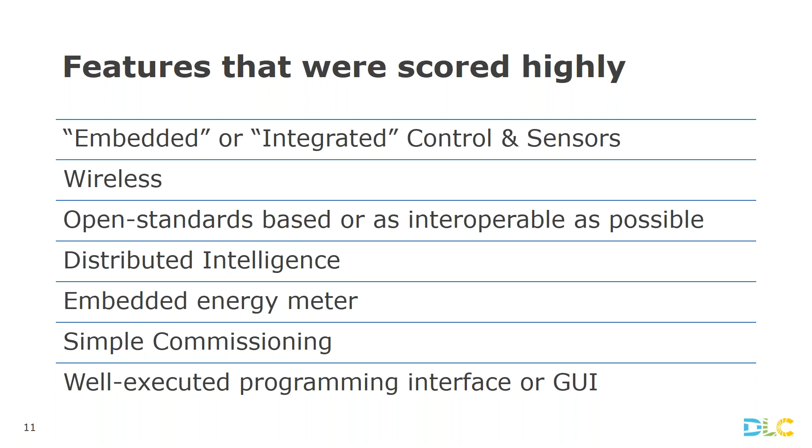Finally, the scorers were looking for systems with well-executed interfaces and simple commissioning. As we know, historically, the complexity of these systems has contributed to higher costs and slower adoption. Out of the 9 technologies that were selected, we ended up with 5.

It was a challenge to find host sites, maybe not surprising, but there was a lot of additional participation required to support these projects by host sites, a strict timeline, which unfortunately didn't fit into the decision-making process of some of the host sites that we talked to, and the systems were not offered for free, and that was by intent. We really wanted the host sites to have some skin in the game, and so they did contribute some towards the cost of these projects. So in the end, we found 5 host sites.

First was Two Roads Brewing Company in Stratford, Connecticut, who installed the Digital Lumens system. Then Rhode Island Public Utilities Commission in Warwick, Rhode Island, installing the Philips SpaceWise system. A multi-tenant medical office building in Avon, Connecticut, installed the Cree SmartCast system.

A Super Stop and Shop grocery store in New Bedford, Massachusetts, installed the Daintree from GE Current system. And finally, Yale University in New Haven, Connecticut, installed the Enlighted system. I'd like to give you a little bit more information about each site and technology, and then Michael will take us through some of the findings.

Our first site was Two Roads Brewing Company in Stratford, Connecticut. This was a large brick industrial building that was renovated in 2012 to hold Two Roads Brewing Company. This is an industrial scale brewing operation with bottling and brewing operations, a warehouse, shipping and receiving, a large bar, tasting room, as well as retail space and corporate offices for the company. The facility was about 100,000 square feet.

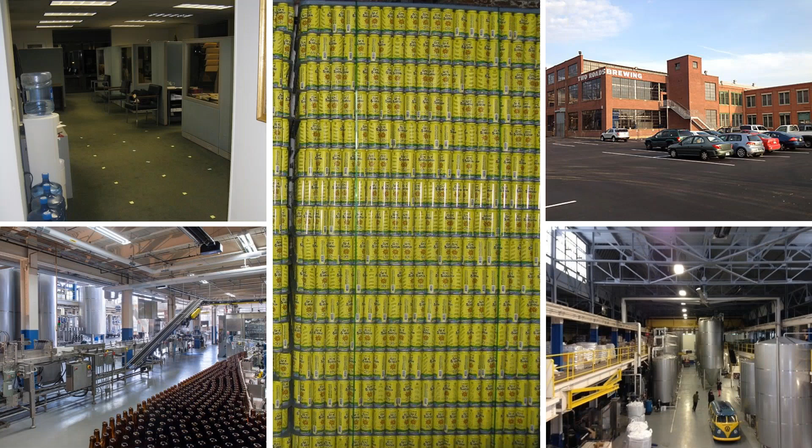We have a few photos of the site here. I would like to note here, maybe at the beginning, that we had some technical difficulties in finding all of our photos, so I apologize, but some of the photos here of the sites are lacking. We might have liked to show you more pre and post photos, but we don't have that.

So you can see on the lower right, the site included some large high bay spaces for the brewing operations with some opportunities for daylight that you can see in the upper left there with some windows. The lower left is some of the low bay space for bottling operations. Upper left is some of the office space.

And in the middle there is, if you're in the Northeast, an iconic, hard to find beer called Sip of Sunshine, and all of us were sort of drooling, never having seen pallets full of it. It's usually something you have to wait in line an hour for to get. So that was fun.

This next slide is showing some screenshots of the Digital Lumens LightRules software. During a post-installation site visit, they showed us how they were using this software. On the lower left is a photo of the scheduling interface, which is really more like an Outlook calendar that enabled them to easily set different schedules for different areas of the facility. This was something they were not able to do, or not easily do, with their prior lighting control panel.

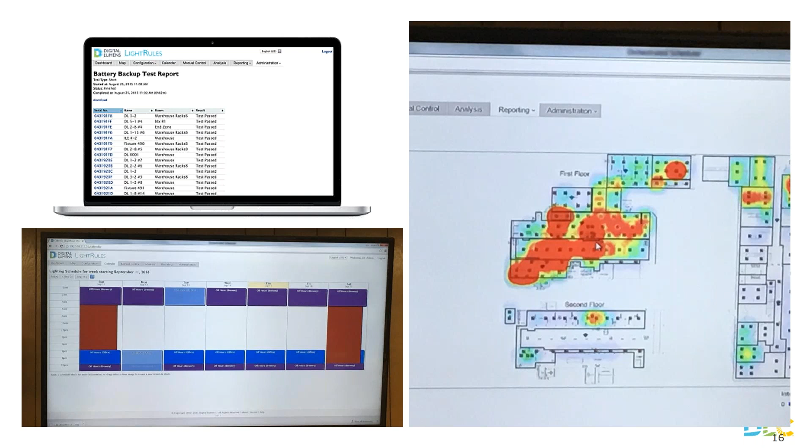On the upper left is a screenshot, actually grabbed online, not from on site, but it was something they showed us on site that we didn't get a picture of: a capability provided by this Digital Lumens system to automatically test battery backup emergency lighting and produce a testing report for OSHA emergency lighting testing compliance. This was something the brewery was pretty excited about. This previously required a manual process, walking around the entire facility to test each luminaire and produce a report for OSHA compliance. With this new system, they can produce a report at the touch of a button.

Our next site is the Rhode Island Public Utilities Commission. This is a 3-story building that houses the state's regulatory body with responsibility for oversight of the state's utilities and communication entities. In many ways, this was like a typical office building with private and open offices, conference rooms, and corridors. However, in addition, it also included a large hearing room for regulatory proceedings that was more like use cases for auditoriums or presentation spaces that were able to benefit from the flexible control provided by the advanced control system. Like the last project, this one involved replacement of T8 lighting, and some of the spaces here actually already had occupancy sensors, which we'll talk more about.

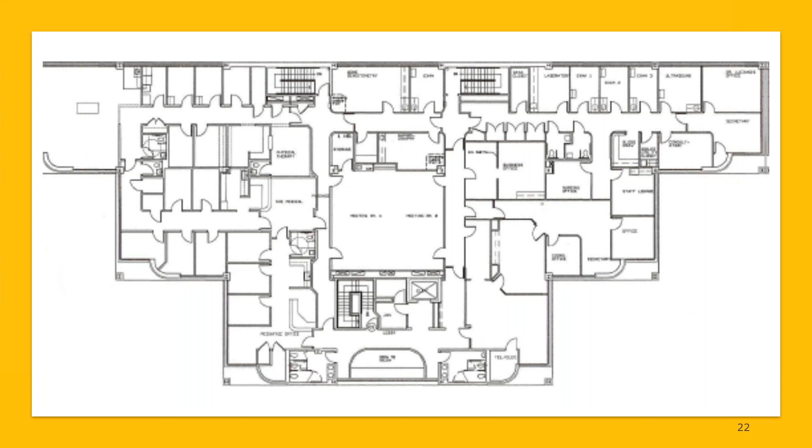We were not able to locate the photos for this project, so I'm showing you the best we were able to find in the files, and this is a floor plan of one of the floors. One thing to point out here is you can see the large number of small spaces. These were the small offices and exam rooms. And we'll talk about some of the challenges we encountered there around occupancy sensors.

The fourth site was a Super Stop & Shop located in New Bedford, Massachusetts. This is your typical full service grocery, over 70,000 square feet. It included a large retail space and some back of the house spaces for offices, shipping and receiving, and storage. Existing lighting at this location was T8, and there were no existing controls beyond some very basic scheduling controls.

The technology installed at this site was the Daintree Enterprise Wireless System by GE Current. This system is the only system that uses an open standard-based protocol, a Zigbee-based communication protocol. It does utilize a gateway and a server that houses the operation and configuration software. At the time of this installation, embedded sensors were not offered by the manufacturer. They are available now. So we didn't pre-install sensors with this one. We installed more traditional remote mounted sensors.

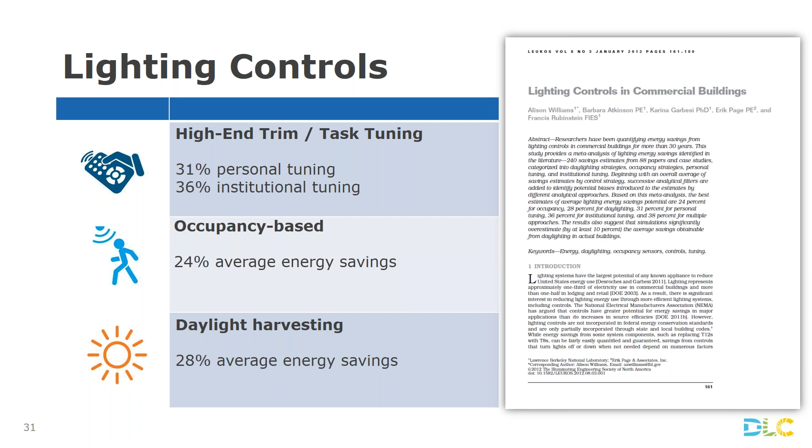Continuing on. So we saw about a total of 40% energy savings when you only looked at the controls. So the concept here is if you've already moved to a new technology baseline, and you only analyze what did the controls provide as an energy savings, it was 40% compared to that baseline.

The three different colors give you a representation of how that 40% was developed, with tuning representing about 50% of the total energy savings, about half of the total energy savings, with occupancy sensors being the next dominant amount of energy savings, and then finally daylight.

As you can tell by the two bands there, both daylight and occupancy sensors provided roughly the same amount of energy savings. It's a good time to note that, as I showed in the previous slide, energy savings from tuning typically is in the mid 30 percentile.

We are seeing with new LED fixtures that some manufacturers are shipping one fixture and sites are tuning them significantly. So in some cases, a fluorescent system might have drawn 30 or 35 watts, but it's being replaced with a 40 or 42 watt LED fixture, possibly for SKU control and other management issues on the manufacturer side, or the contractor doesn't want to have to manage which fixtures go where, and then they just are going to tune them in the space. So in some cases, we've seen some artificial tuning numbers that are maybe 60 or 80%. At that point, it's probably that the new fixture installed was over capacity, but there were other reasons for it.

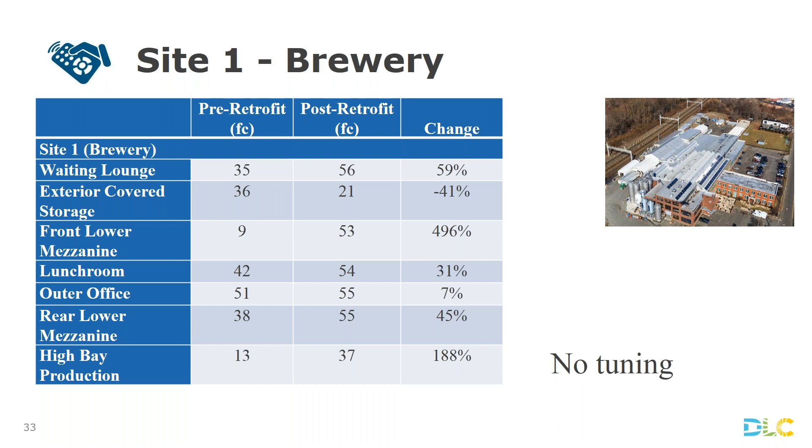There are some high light levels. 56 foot-candles in a waiting lounge is a pretty bright waiting lounge. Same with a lunchroom. Had they used tuning, they probably would have reduced those levels and seen some additional energy savings.

Continuing on, the medical office, as Gabe mentioned, this was a multi-tenant medical office, which complicated the demonstration, obviously. The other challenge here was the site originally resisted activating certain levels of controls. They went first with occupancy sensors and didn't activate the daylighting and some of the tuning features, even though they were already installed on fixtures. It wasn't until a second trip back to the site that they activated those features.

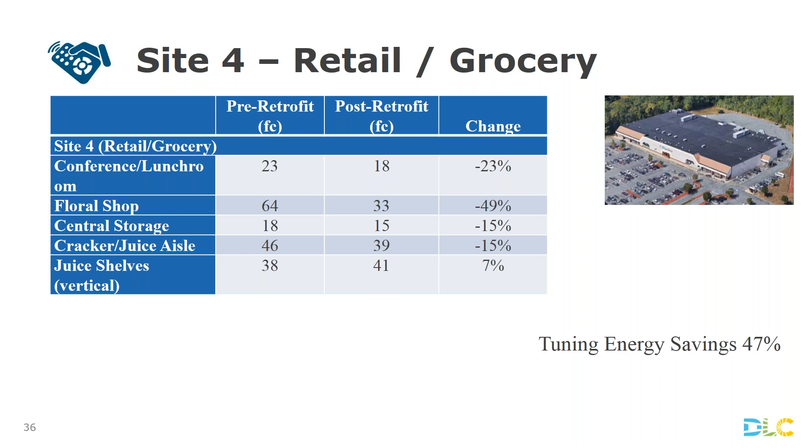But notice the change they saw in the floral shop, going from 64 foot-candles to about 33 foot-candles. Again, tuning allows you to really not have to accept one light output for the entire space, and you can dial it in. In a retail application, it's a great example of you may want less light in a floral shop, either to just make things stand out or to draw people different places in the store.

In the previous installations, they were going from straight on, off. In the newer settings, they were going from on to low output to another time delay, then finally off. So that is reducing some of your energy savings. Also, there's a difference in sensitivity features between the two controls, and the digital ones might be more sensitive. So it's something to pay attention to as you migrate to newer controls. They may not behave the same way you previously thought, and you may result in some cases in negative savings.

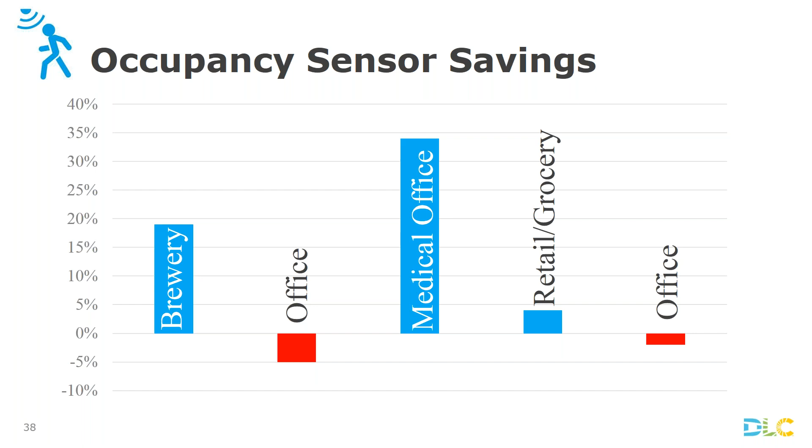Continuing on to daylight savings, we saw a pretty good consistent range between 6 and about 16% energy savings from the daylighting. The biggest challenge with daylight energy savings is architecture. As much as you might think you're going to get energy savings from daylight sensors, it's really all dependent on your building. Do you have cubicles? How high are they? What are the reflectances? What other design features do you have? Those affect daylight savings more than the lighting control system selected or the light fixtures. So very much pay attention to your space and don't assume certain levels of daylight savings will be available.

Moving into some of the cost effectiveness of this, a typical lighting installation is about $4 a square foot. That's a general rule of thumb. Don't hold me to that if your project comes in differently. But you'll notice that two of the projects came in much higher, one at $7.99 a square foot, and the other at $5.72 a square foot. Those were actually more affected by the fixture selection, not the lighting controls. In those cases, different appearance of fixtures affected those prices more than the lighting controls. So again, your fixture selection can affect your overall cost, not the controls.

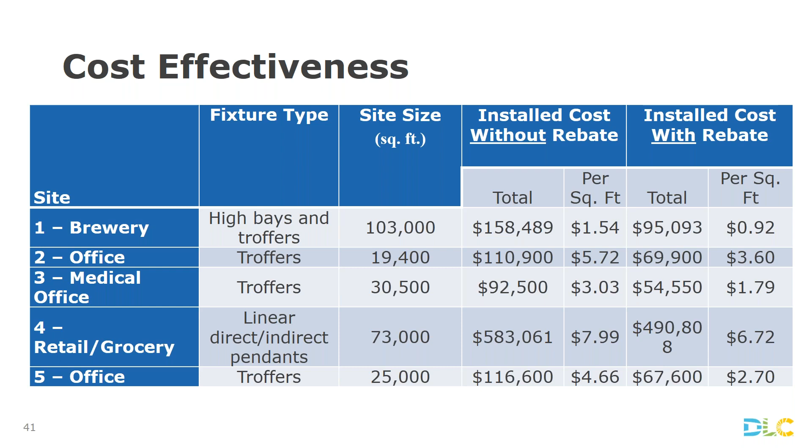But also notice the rebates on the comparison of two slides. Rebates are very helpful. In some cases, it reduced the project cost by almost 50%. They are still needed and can help make or break a project.

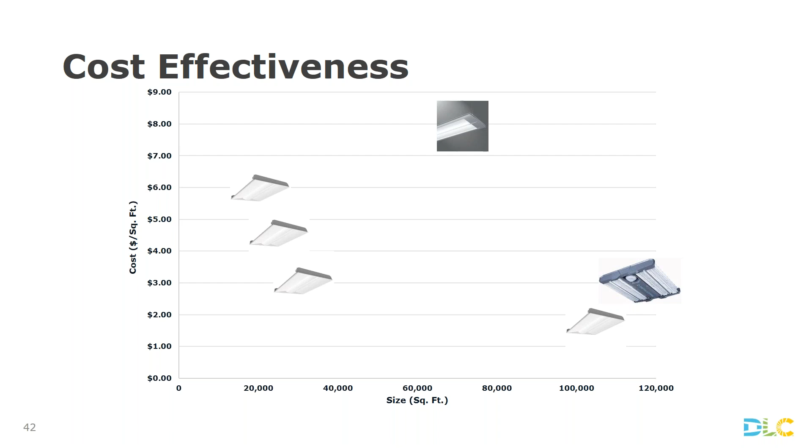Continuing on, we saw a wide variety in terms of payback as well as saving to investment ratios. SIR is saving to investment ratio, and if you're not familiar with that, the idea is over the life of the system, in this case it was assumed 20 years, will the system pay for itself? You want the SIR to at least equal 1, so it's paid for itself in 20 years, and the higher the SIR, basically the faster it pays for itself.

Again, rebates played a role. You'll notice that as Gabe mentioned, the brewery had previously been upgraded only 3 years ago with a fluorescent technology. That's one of the reasons why the simple payback without rebate is over 11 years. If you're comparing against a relatively efficient baseline, that can affect the cost effectiveness of your new installation.

Similarly, for site number 2, the office, that was already a very efficient operational scenario as well as low operating hours. That's why the annual energy savings are much lower than all the other sites, which affects both its payback and some of the other features. So again, they all play a role.

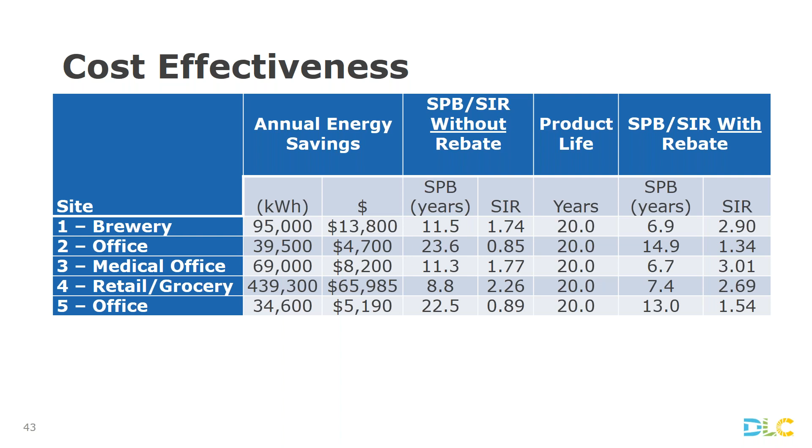Though I would say don't be scared by that 45-year payback. The actual absolute cost was so low compared to the overall project. It's helpful just to include it on the project because it's not going to really push you over. Also, in this case, had the occupancy sensors not been in the baseline, you probably would have increased your energy savings and therefore not had the negative value and been able to claw back and make your economics a little better in this scenario.

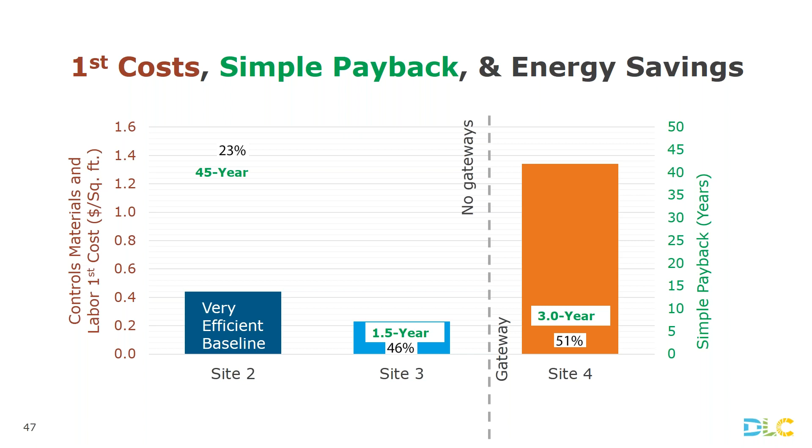Continuing on for some user feedback, as Gabe mentioned, that was one of the concerns. First column is morning, second column is afternoon, third column is nighttime appearance, feelings about the lighting systems. First row is before system, the fluorescent. The second row is the LED system, obviously.

Pretty much the big concern was really in the morning, and it was both on the fluorescent and the LED. That may not be lighting system dependent. It might be just that we're more sensitive in the morning, or that the daylight is brighter because of the angle of the sun, that might be driving it rather than the lighting system. By afternoon, both systems were pretty acceptable, with no one really complaining it was either too bright or too dim in either the fluorescent or the LED system.

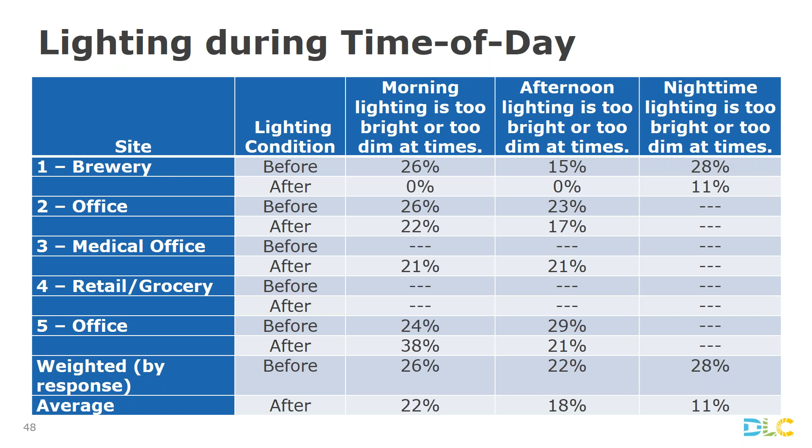Unfortunately, none of the sites really operated into the evening hours other than Brewery, so we don't really have good comprehensive comparisons to make about the nighttime appearance. And then finally, we asked additional questions, the first column being satisfied with brightness, either neutral or not. You can see that overall, with the fluorescent, they were pretty comfortable with it, yet when they went to the LED system, that resulted in even more satisfaction with the brightness or neutral opinions of the lighting. So that's great to hear.

Also, most of us on the phone are lighting practitioners or in the field, and we know that you can ask people lots of questions about lighting, and they don't even always know that you replaced it. So it's not entirely surprising that they like both fluorescent and LED the same. That's pretty expected sometimes. I'll return the presentation back to Gabe.

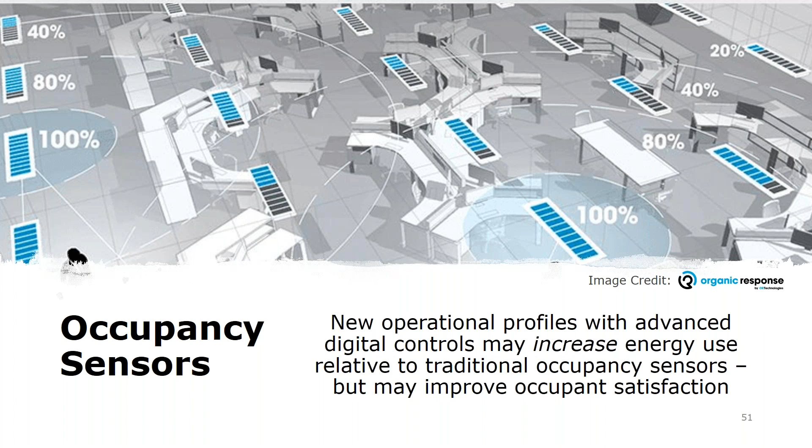Secondly, another occupancy sensor issue here. The thing we learned here is that we really need to consider the occupants' needs and desires for local control. Many of these new integrated sensor technologies, where you've got the sensors integrated into the luminaire, no longer put the sensing or control on the wall. Rather, they are integrated into each luminaire, which provides automatic on control and doesn't require any form of wall-mounted control. Each of these systems does offer optional wall-mounted controls. However, at the time of these projects, they were pretty expensive add-ons, $50 to $100 per switch.

If you consider that these optional wireless switches were only controlling a small number of lights, like in a private office or an exam room, they can have significant negative implications for the project paybacks. So we went without the switches in our initial installation to see how the automatic on control would work with occupants. It turned out we had to go back and install these optional switches in a number of spaces on 2 of the projects. In particular, the exam rooms in the medical office building, and also a number of private offices where the occupants wanted the ability to control their own lights, to turn them on when they wanted to, not having them come on automatically, and to dim their lights when they didn't want the full light levels.

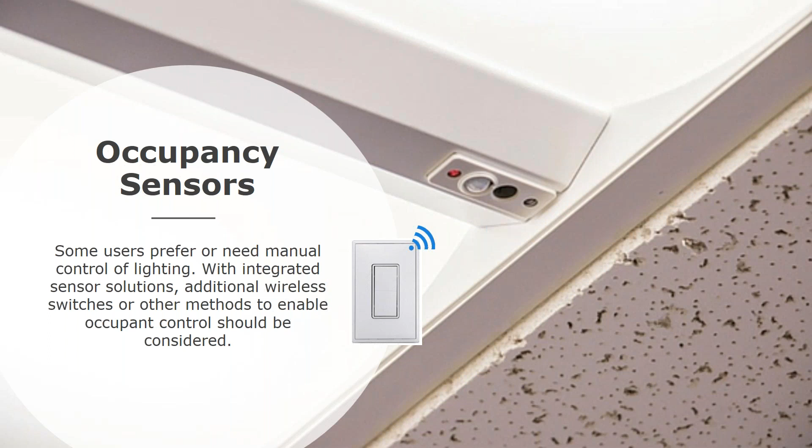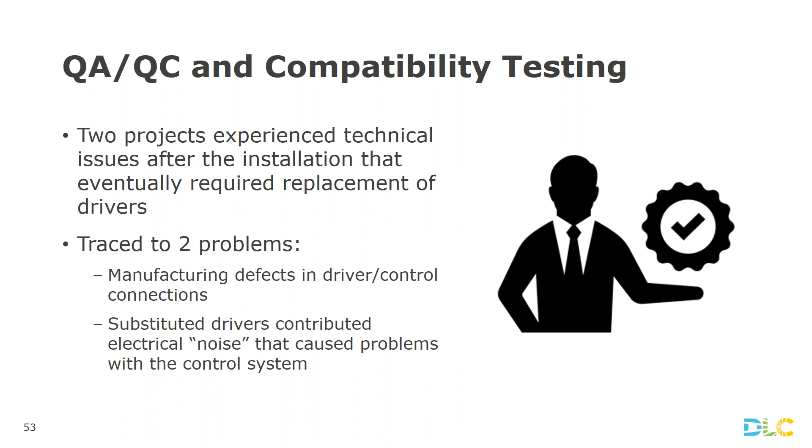So what can we do about this? Some of this is growing pains with new technology. There's no doubt about that. And we know that the manufacturers of the products that experienced these problems in these projects learned from them and immediately implemented changes in their process to ensure these are not going to happen again on any projects going forward.

Manufacturers are going to need to continue to learn from these things and improve their QA/QC processes and their compatibility testing. But I think there's a greater role for the industry here, as I think there's a role for industry standards to address some of these challenges. Standards could have been defined, for example, around the electrical noise exhibited by drivers so as to not cause problems with wireless control systems.

We know there's a lot of work occurring right now in the industry around standards for these technologies, and there's a lot more work yet to be done. And it's something that we need to continue to support and do more of so as to not inhibit adoption of these technologies due to bad experiences for customers.

Third topic for lessons learned is around cost effectiveness. As Michael presented, the paybacks of these projects varied a lot, and they were not great and not in the range that would typically support widespread adoption. And we need to caveat these numbers as we don't believe they were representative of typical projects today.

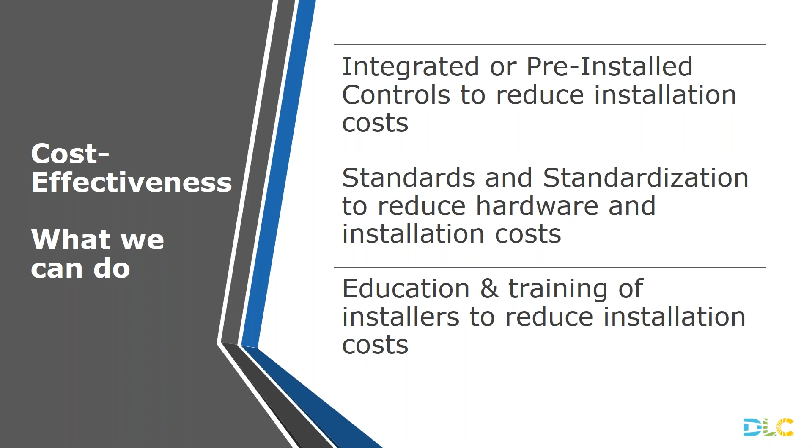Finally, around this cost effectiveness, there's a lot we can do to better communicate the benefit of advanced lighting controls and how we sell and consider purchasing the systems. The benefits of these systems go a lot beyond the energy savings that they provide.

When we have more advanced control of our lighting, we can use it to improve lighting quality for building occupants. With this improved quality, we can improve productivity, employee well-being, and create better environments for our employees and customers that make them more comfortable in our spaces and want to be in our spaces.

In addition, these advanced systems enable smarter management, not just of the lighting system, but of our buildings, our people, and our processes. And this is where the bigger benefit of these systems lies. We spend much of our time building the entire justification for these systems around the energy they save, but the greater benefit is not necessarily with the energy.

So a lot of times we reference this 3-30-300 rule when we consider this. And this says that a typical building spends $3 per square foot on energy costs, $30 per square foot on rent, and $300 per square foot on its people.

These systems, through their space utilization benefits and uses, and their lighting quality benefits, address the much bigger costs for customers in their buildings and people. But we're not typically considering this in the value proposition for the systems. So this is where we have a lot of work to do in considering and communicating these other benefits of these systems and how we sell and consider purchasing these systems.

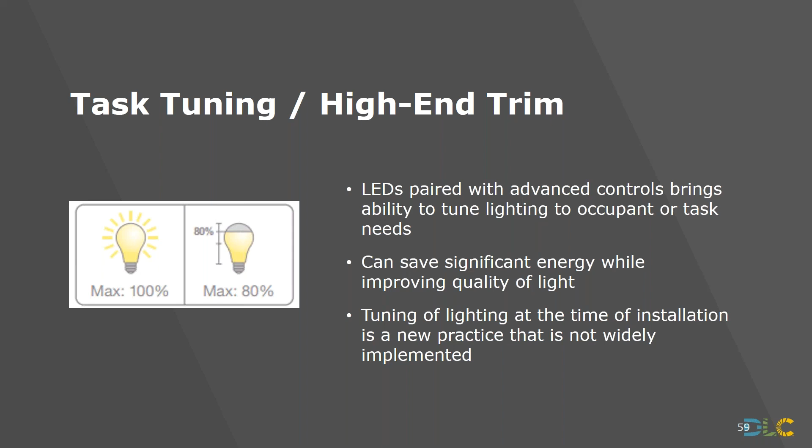Several of our projects saved a lot of energy by task tuning. As Michael presented, the largest portion of control savings was actually by task tuning and high-end trim. It was not occupancy, it was not daylight harvesting. But to realize this opportunity at scale, because it's really not part of most projects, we need to make task tuning a standard part of installation of every project. And so here's some things we can do.

For manufacturers, one thing you could do is to incorporate this task of configuring your task tuning, your high-end trim, into your configuration apps and software as a standard step. We've seen a lot of these systems with their configuration apps where they kind of walk the contractor step by step through starting up and configuring a space. So if you're not already, build this step into it as a standard step.

Contractors, make this a standard part of your installation. After you install the lights and you set up the controls, tune the lighting. And if you don't know what the customer is going to desire, then tune it right to the IES light levels. This is going to require you to have a light meter and also to be knowledgeable around what the IES recommendations are for light levels and what the occupants and tasks will be in the space. But that's, I think, generally a new practice enabled by LED.

For specifiers, procurement, and users, this is something that you can fold into your standard specs to require the contractor or installer to do this step and actually include it in your punch list. So before you leave the job site, this is something that has to be done.

And then finally, there's a role for utilities here for supporting this energy saving feature in your programs, considering providing rebates or financial incentives specifically for the implementation of task tuning. We're already providing rebates and incentives for occupancy sensing and daylight harvesting, but as is illustrated by these projects, task tuning can actually get you more savings. So there's a real opportunity here to develop some specific incentives and program support for this efficiency measure.